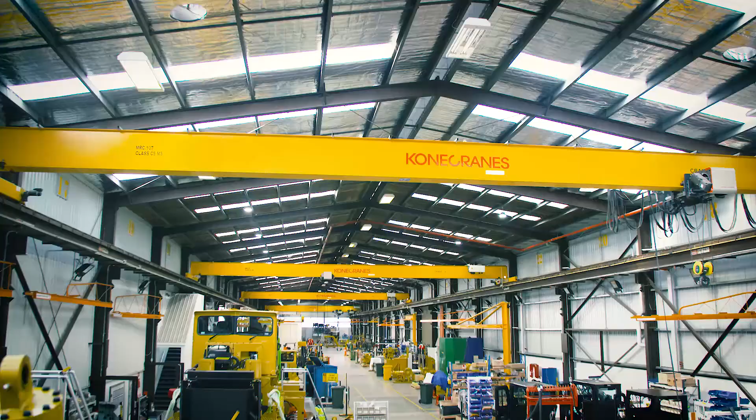We manufacture heavy mining vehicles for the mining industry around the globe.

Hi, my name's Kelly Elphinstone. I'm the Managing Director of Elphinstone Pty Ltd here in Tasmania. Elphinstone has a very proud history here in Tasmania of manufacturing for the mining industry. Elphinstone commenced manufacturing in 1975.

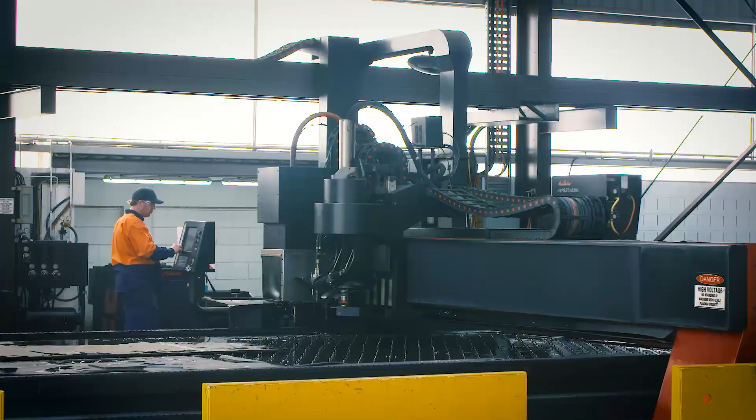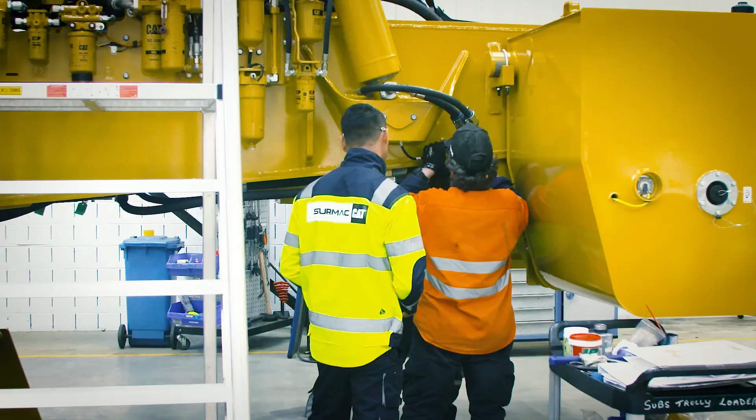We have currently 320 people employed right here on the northwest coast of Tasmania, and that ranges from tradespeople, boilermaker welders and diesel mechanics, right through to our product development team of 40 people.

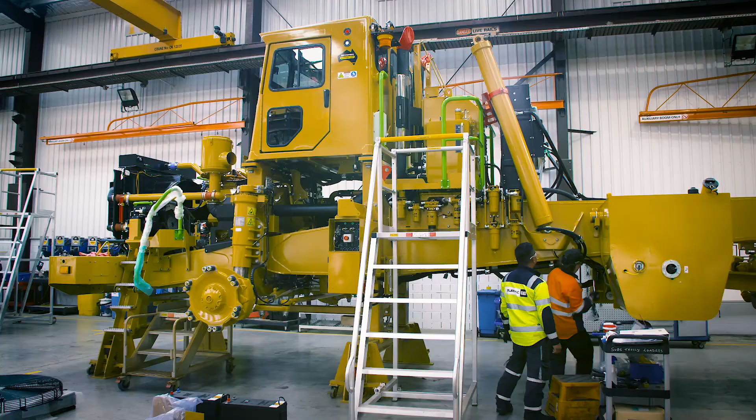The products that we manufacture for the underground mining market range from anywhere from a 5-tonne to a 20-tonne payload, whereas on the surface we manufacture an 80-tonne haulage truck. And the value of our products range anywhere from $300,000 to $1.5 million.

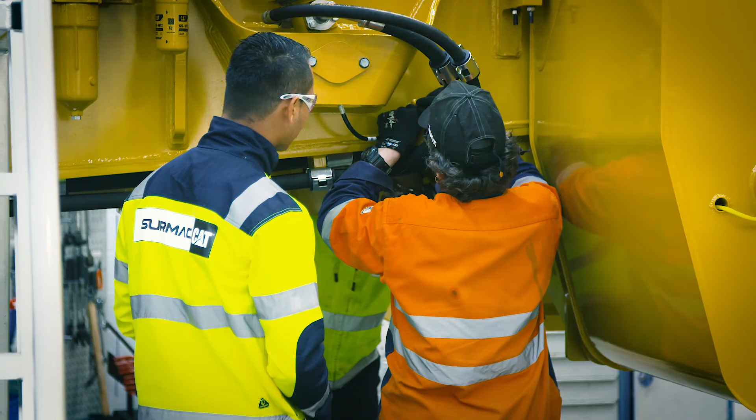We're very good at niche manufacturing, high-end quality products that take detailed labour, that aren't just high volume turnover products. So right from the get-go when we're designing our products, it's designing them with lean production in mind and manufacturability in mind. Hi, my name is Ben Sando and I'm the General Manager of Operations at Elphinstone.

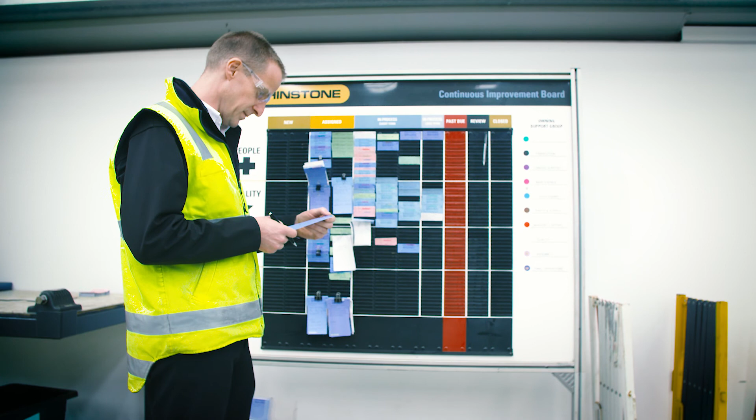At the heart of lean manufacturing is continuous improvement. So we have a very robust continuous improvement process in place here where people from all levels of the business, in all departments of the business, can put forward a continuous improvement idea. We then get together as a team on a weekly basis to review those ideas, some fantastic ideas from all levels of people throughout the business.

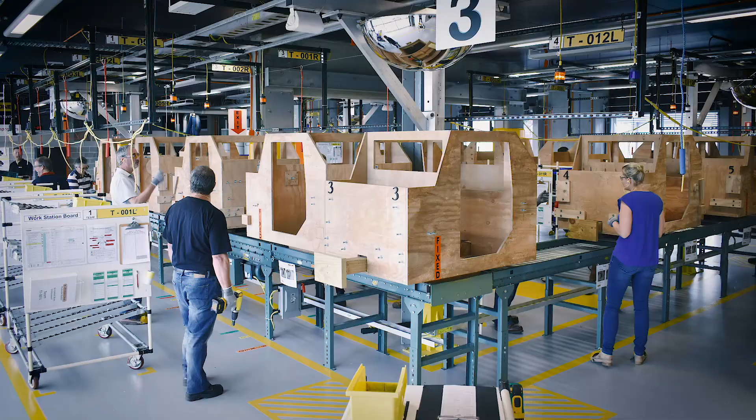So we provide lean training to as many of our staff as we can. We have a simulated work environment which is owned by the Elphinstone Group, which we put a lot of our people through, and a lot of external people use it as well. It's a really powerful tool for helping people understand what lean means, what waste means, and how to practically implement it. And it's a fair bit of fun too. It's a good session to go through.

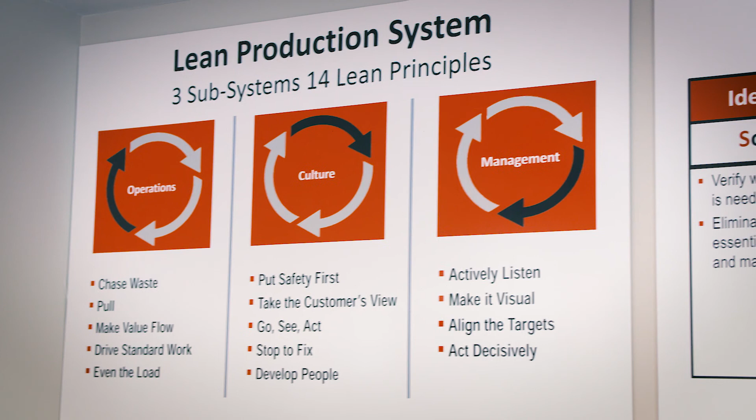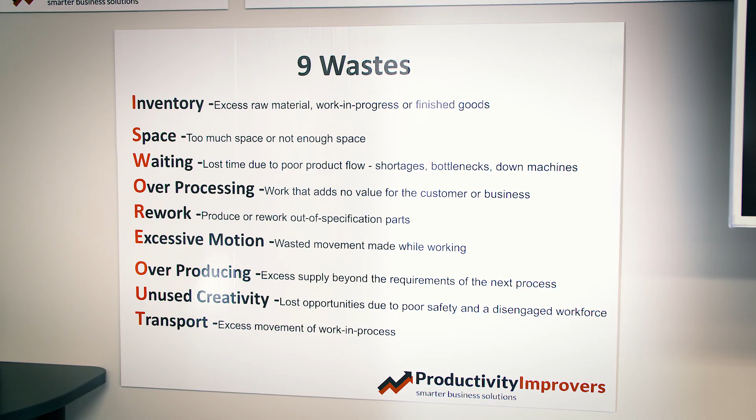So lean production systems and continuous improvement forces us to continually review our processes and look at where we can take waste out of those. And waste is anything that doesn't add value to our end customer or that our customer's not prepared to pay for. So in order to remain competitive and keep our costs down, we're continually looking at our processes as to how we can be more efficient, where can we take out waste, and where can we ensure that we're adding optimum value to our customers.

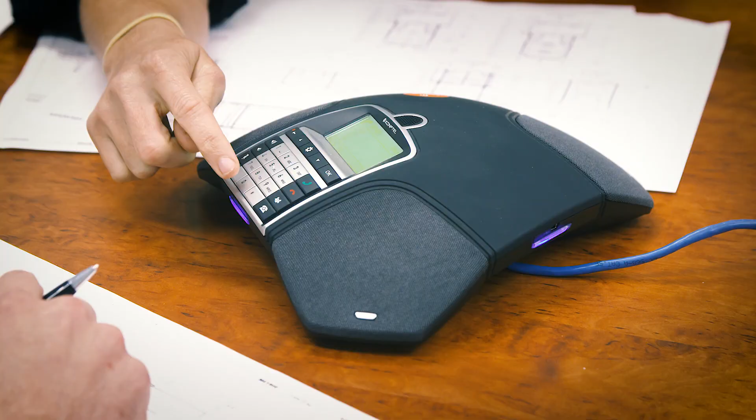We have company representatives in all parts of the world where we go and talk to our customers, talk to the dealers who service our customers, and understand what they need. It's not just about what we can sell them, it's about what they need now, what they think they can need in the future, and that way we can focus our development efforts in the right areas to make sure that we're set up for the future.

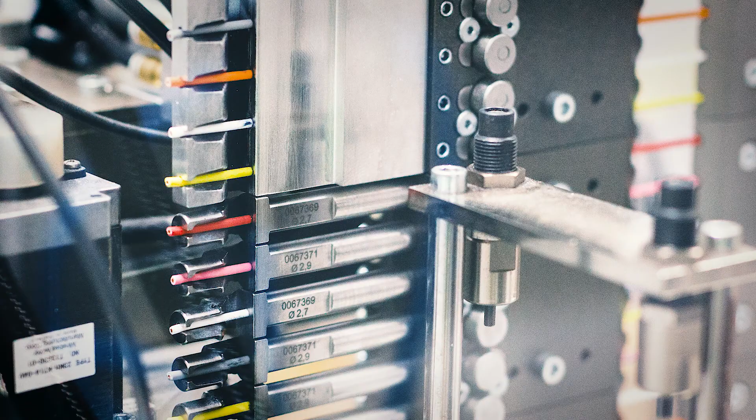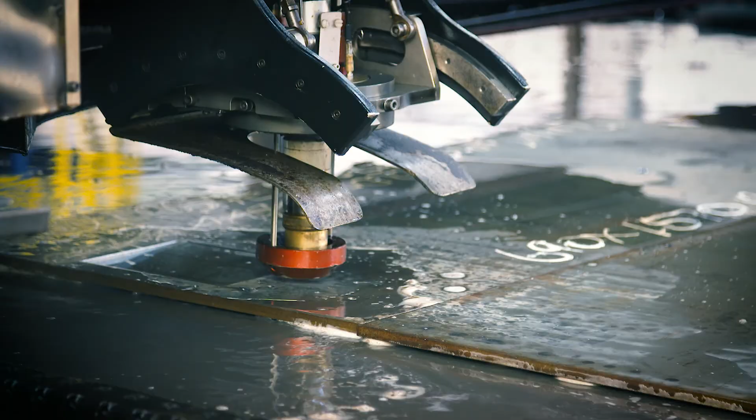The workforce here at Elphinstone has evolved over our history, particularly from a technology perspective. Our customers are evolving and demanding cleaner, safer technology on our machines, which means we need to evolve with their demands. So certainly the introduction of more software and automation and technology and electronics on our products, but not just the technology on our products, it's the technology that we use to build our products. So it's very important that our tradespeople and their skill set are able to evolve with the new technologies that we use to manufacture the products we sell every day.

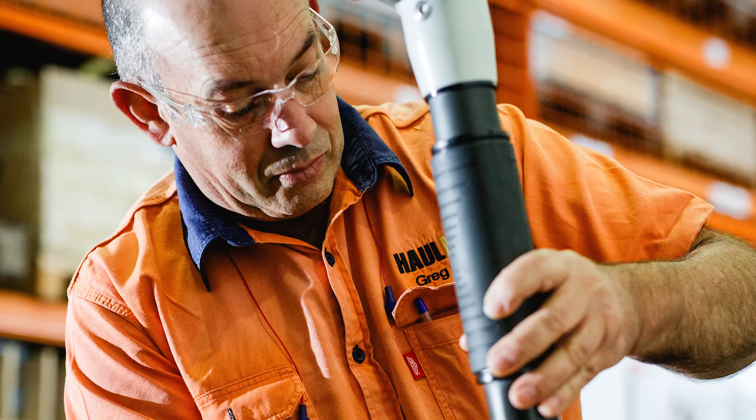We encourage our tradespeople to go on and do further study and progress their trade into an engineering degree so they become part of our design team. Tradespeople that progress on to become designers actually bring a manufacturability design element to the designs that they're making. Having that real-world experience in the equation really helps out.

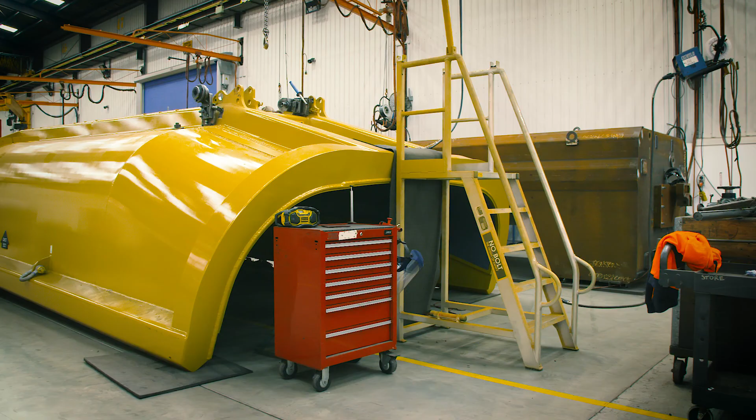Trades of today have changed significantly from those that the next generation's fathers and grandfathers may have participated in. As you can see from our facilities, we have extremely clean facilities. In fact, our tradesmen often leave work as clean as they come to work now. And it's not the dirty job that it used to be. And certainly the careers that can come from that are extensive.

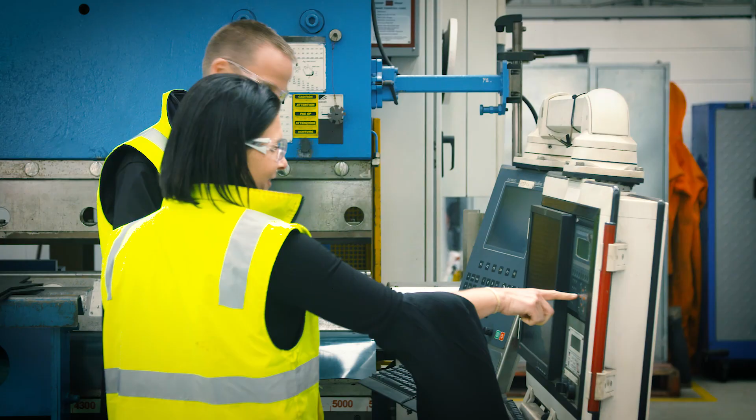As a business, we encourage schools to visit us whenever they can. We always say that you can't do what you can't see. So if the students don't understand what it means to be a diesel fitter, then they won't want to be a diesel fitter. So we really encourage the schools to get involved.

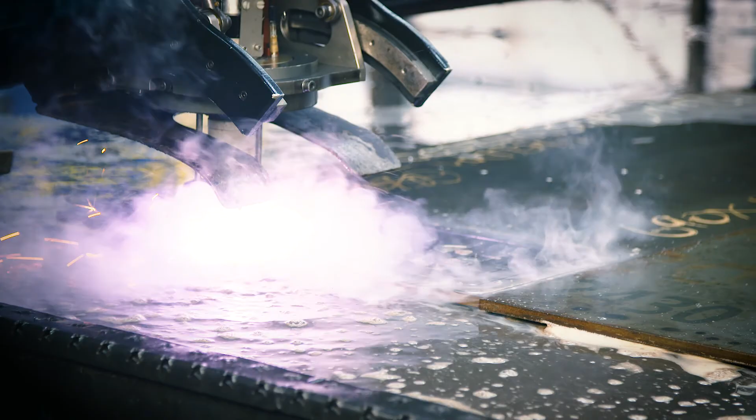Millennials and Generation Z, how do we continue to attract those kids into critical trades that we still need? They certainly don't want to step out of school and into the workforce and feel like they've taken a step back in time. So it's important for us that we invest in a lot of technology here in our trade. So we have robot welders, where there's a lot of programming and software that's also involved. Our machining centres are all now driven by programming and software. The way we train our tradespeople now are using simulators.

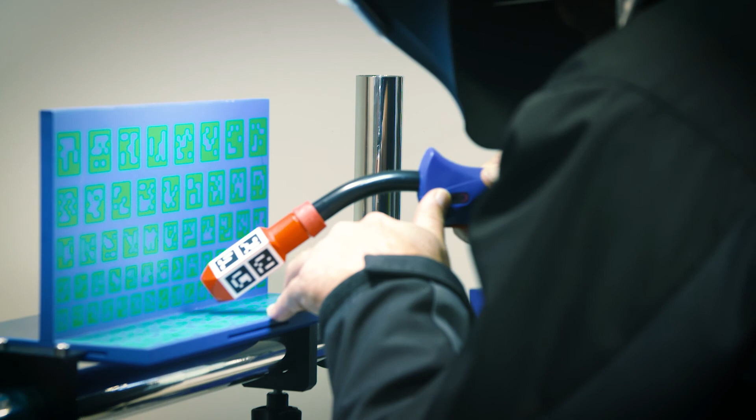Our advice to any business out there, whether you're a manufacturer or not, is look after your people. Your people will always be your most valued asset, and if you continue to invest in and engage with your people, they will continue to give back to you. And that's the single most important thing in our success story.

For employees that are entering manufacturing, you get out of a job what you put into it. If you're willing to learn more, you're willing to take on new tasks, you'll enjoy a healthy and long career. I got to the role I got to by giving it a go. You've got to be willing to step out of your comfort zone and try something new, and you might just enjoy it and you might find you're good at it.

My grandfather always used to say, if you have a good purchasing experience, people rarely remember what they paid for the product, but they always remember who they bought it from and how they were supported. And certainly when you're building a value product and you're selling based on value and at a premium price, you have to stand behind your brand and you have to always demonstrate the value that you bring to the table. Never stop selling the value that you bring to the table.